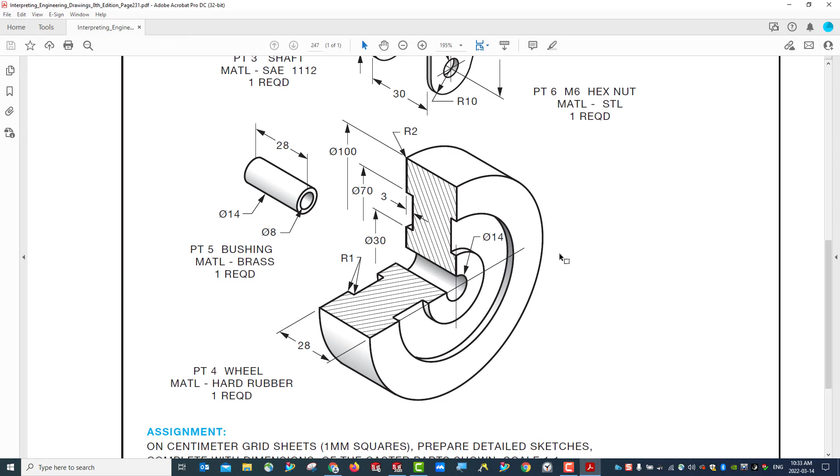Let's look at this drawing first. Here's all the components: Part 1, post. Part 2, bracket. Part 3, the shaft. Part 4, wheel. Part 5, bushing. And part 6, here's the nuts. This is the standard parts, so we can download from this supplier, or we can insert the nuts from the library if it's available. Now let's get started.

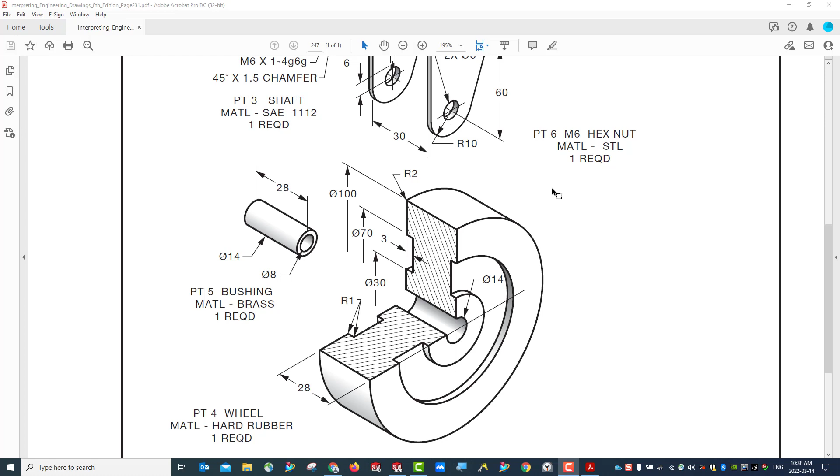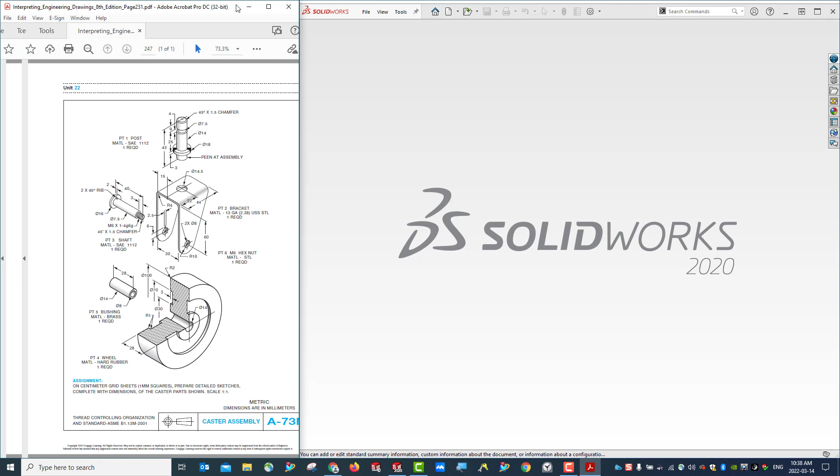From making this simplest part, wheel first. We're going to put our windows side by side so we can have it more easily. Let's make a new part. Hit OK.

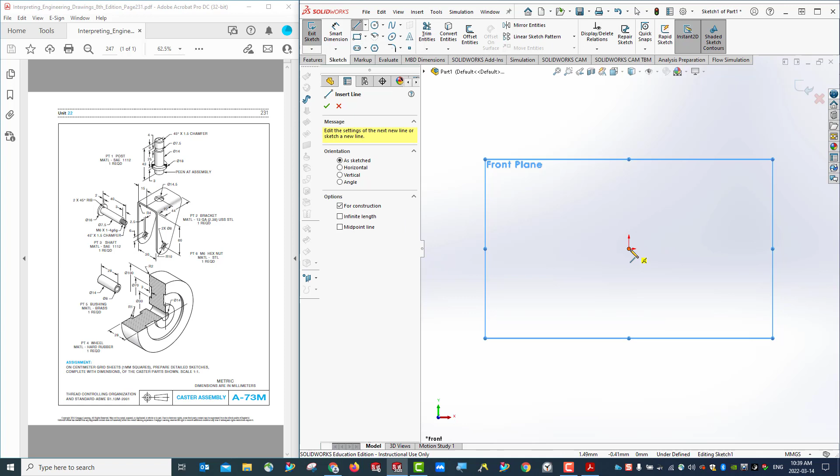First, determine your unit. We see here it is millimeter. We start with sketch. I'm going to make this section and revolve it. I'm going to make this front plane as my sketch plane. Sketch. As usual, I'm going to create my reference line, vertical and horizontal. Now I'm going to create the profile.

I'm going to create just a quarter and then mirror it, so it will be something like this. And then we have a slot here. Make another one, make slot. Uh-oh, I don't want to make this one to be the center. Okay, so you can see we have a slot here, we have a slot here.

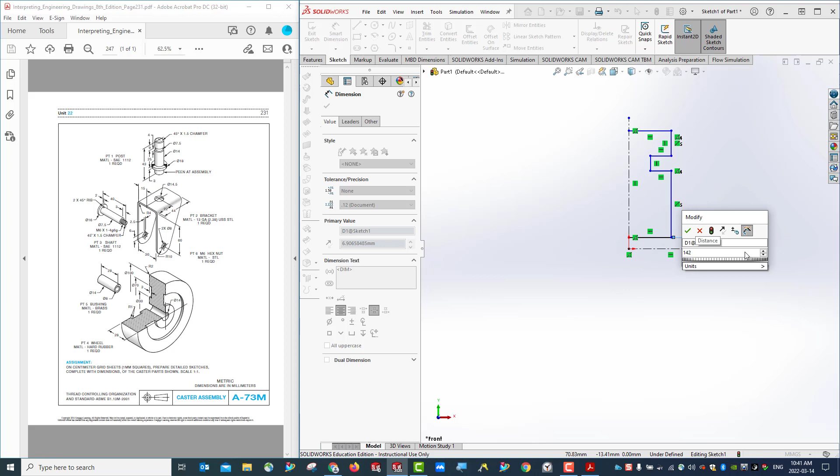I'm going to trim it. Alright, now give it dimension. From here to here is the hole size, which is 14. So 14 divided by 2, divided by 2.

And then the overall diameter, 100, then divide by 2. Oh, that's too bad, so I'm going to move this down.

Okay, and then we know this rim is 70 from here to here, 70 divided by 2. And this is 30, so from here to here, 30 divided by 2.

Okay, and then from here to here, 28, from here to the center. Cancel. From here to here is 28 divided by 2. Okay, this one.

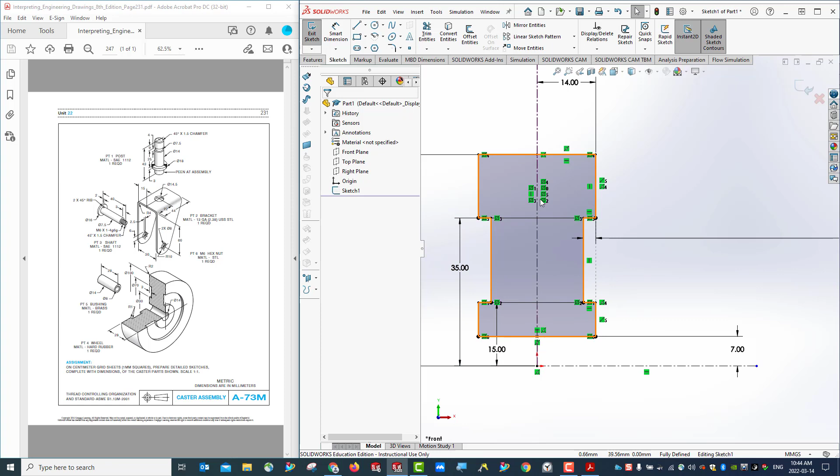Exit sketch. I forgot this line, so let me edit the sketch and mirror again, mirror this one above the center line. Hit OK. Now I should get that's right. So once my profile becomes a closed, enclosed area, then the sketch becomes dark, indicating it is a closed loop.

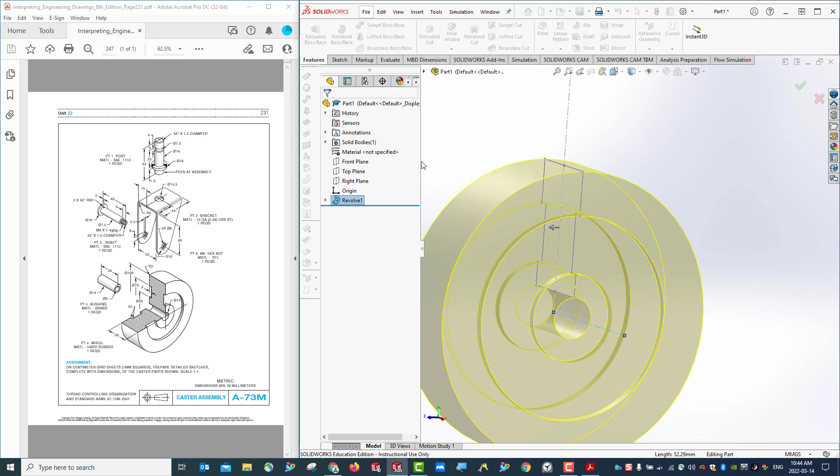Now I can get my wheel. Use revolve. Here's my plane. Okay, hit OK. There are lots of details here.

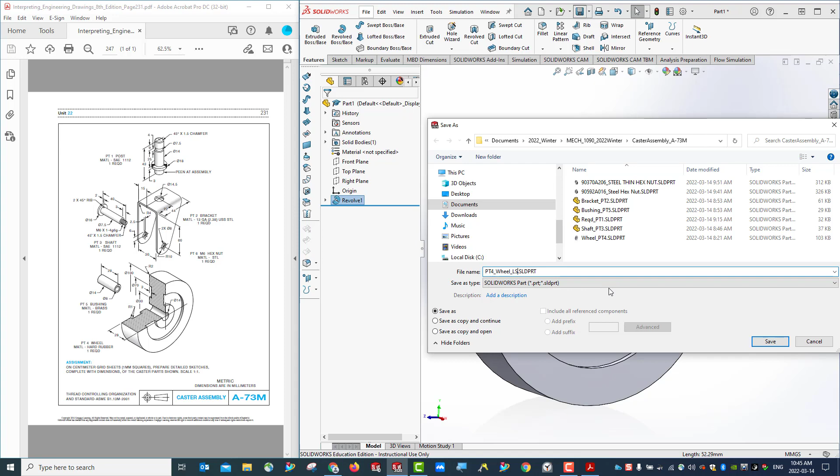I'm going to leave this detail for now, and I want you to do this by yourself. I'm not going to demonstrate this here, so I'm going to save this part as part 2, part 4, wheel, and give my initial. I always put my initial at the end of my file, so I know it is created by myself. Whenever you get your part done and you're satisfied with the modification, save your file.

Now we get the first component being created. Instead of creating the other components, we are going to use a different approach. This time we're going to make the assembly first. So we're going to create a new, this time the assembly, hit OK. You can see, and we put this one into our assembly. Okay, now you can see the assembly and the first component.

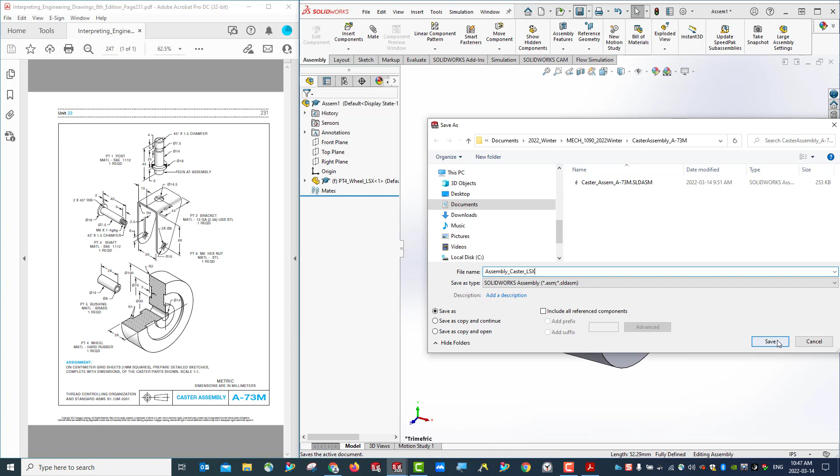Let's save this file first. So it will be assembly caster with my initial. Save it. Also, make sure it is in millimeter.

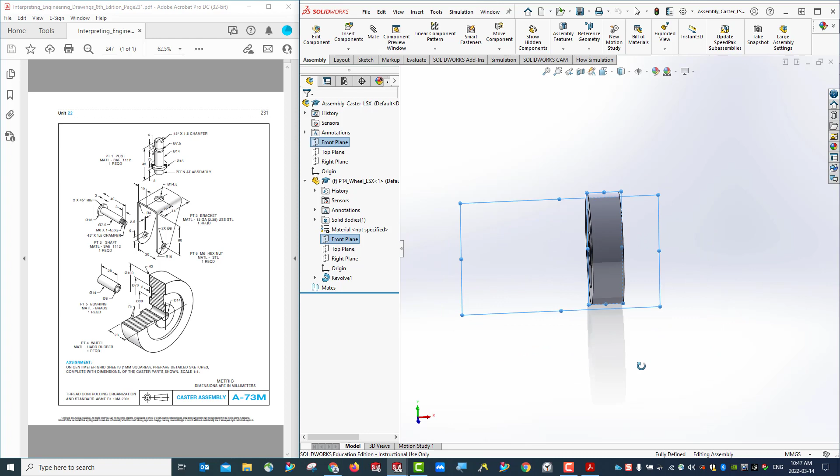Now you can see, if we look at the front plane, whether they are aligned or not. They are not, right? So that means they are not in the position as I expected. So I'm going to modify this.

First, I want to make my part float. The first component being put in the assembly, usually by default it is fixed, so I want to make it float. Once I make it float, I can move it to the desired location. So I'm going to make the front plane aligned with my front plane.

Coincident, accept this, and then top plane with top plane, coincident. Right plane with the right plane, coincident. So the coordinate system of my assembly and the wheel will be coincident to each other. Okay, so you can see origin and origin are the same, right? They coincide. All right, let's save this for now.

Because I already have my mates, it's similar to what we have with fixed. Okay, we will not be able to move this part without disabling our mates. Now, if we look at those mates, those mates allow me to fix my components in the assembly. So I'm going to put this one.

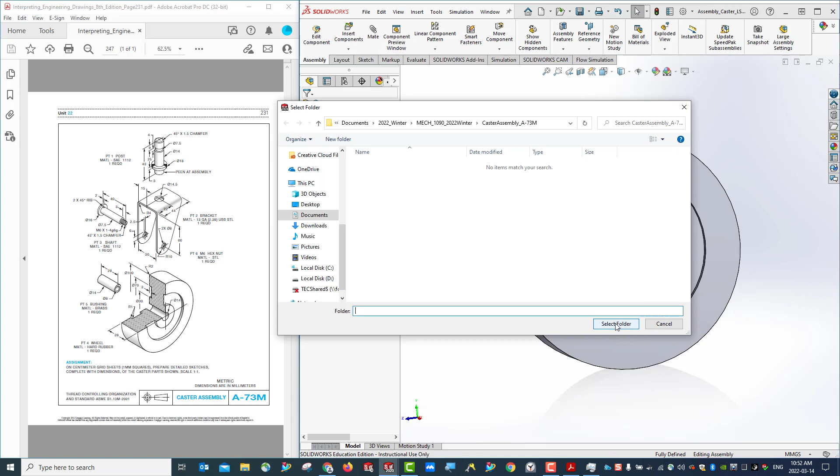Okay, save this part externally, so it will be on my disk. So I give the name. The folder is the same as my assembly folder, and I give the name. It will be part 5, bushing, with my initial. Hit OK. Save my file.

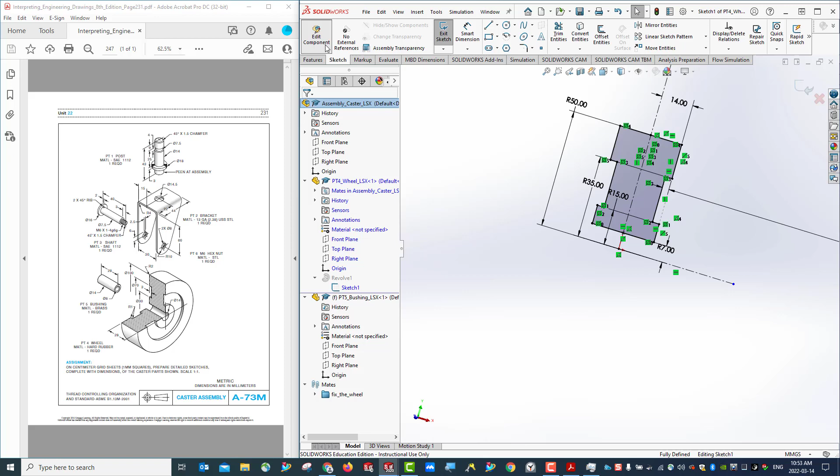Okay, now you can see. What can we use? We can use our sketch here. Make it visible. Okay, and then we're not going to modify this one. Instead, we want to exit this edit components.

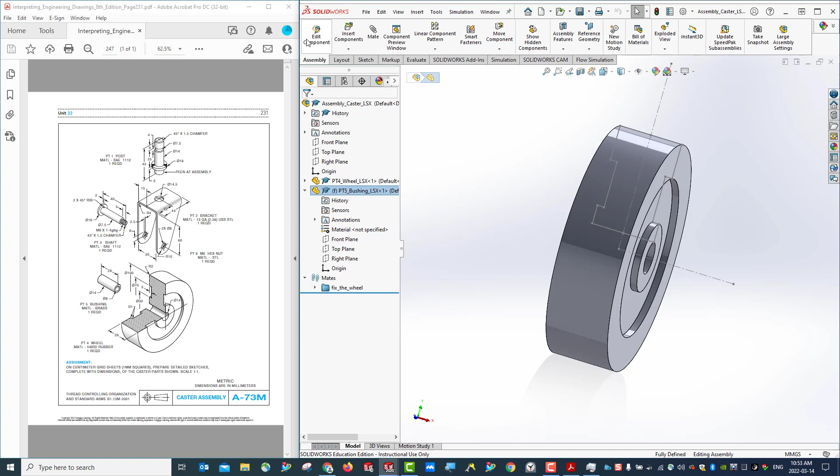Actually, we would like to edit this component, part 5 bushing. So select this part 5 bushing and hit edit components. Make sure it is in assembly, right? So now we can work on this, and we use front view to do this.

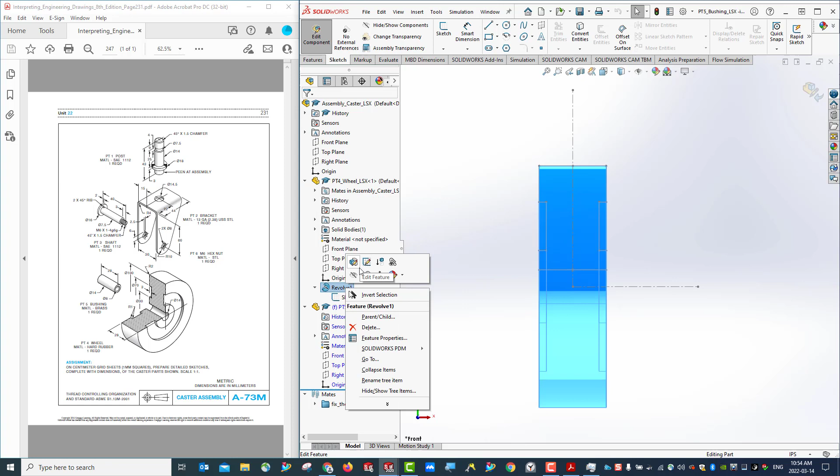We're going to create - let's hide the solid first, so it will allow us to get a more clean view, right? You can see part 5 bushing is in blue, so it becomes available for us to make some sketches, make features, do anything, and modify this part. Okay, in the title bar, you can see part 5 bushing in this assembly is what we're looking for, what we are working on.

Okay, let's get started. I also want to use this front plane to create my sketch. Just okay, make sure you're creating your sketch in this part 5, not in assembly, not in part 4. Okay, so this is very important.

As usual, I'm going to make an assembly reference line here. Okay, here's the horizontal reference line, and then vertical reference line. Then I'm going to make a rectangle.

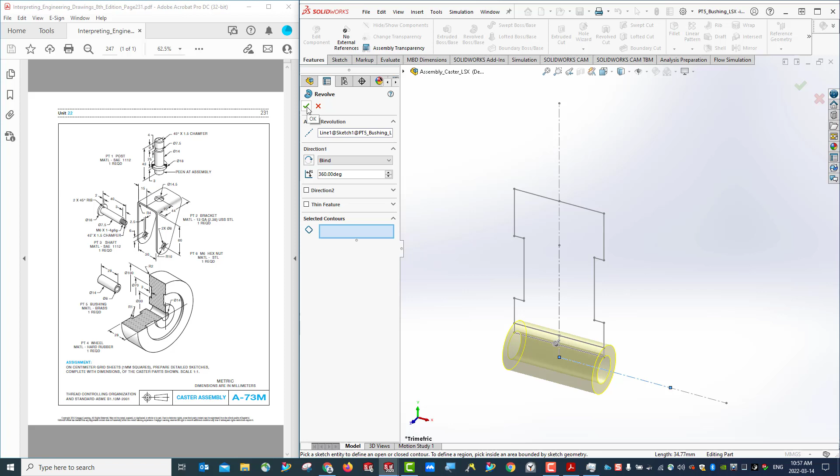Simply revolve it. We're going to use the sketch here, and this sketch profile is being automatically selected. If you have other complicated geometry you want to create, then you need to select a different curve as your profile. Okay, now we have the bushing.

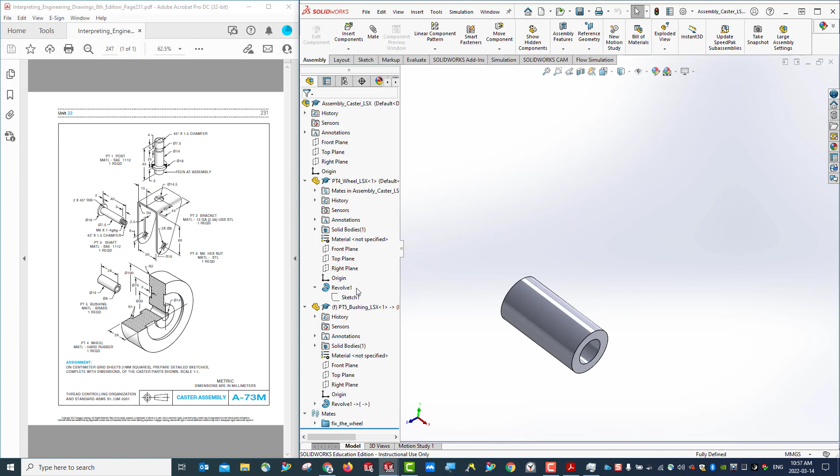Right, so let's save this file, and then click Edit Component to return to the assembly. Okay, so let's hide the sketch and show the body of the wheel. Then we have 2 components now. Save everything. Let's Control 7 to bring to isometric view to see our assembly.

So this is the second part being created. All right. Now we have 2 components. We can start to create other parts.

Again, we're going to insert a new part in the assembly level, part 3. Let's save this one. Okay, double check whether my datum plane aligned with my datum planes in assembly, which is correct.

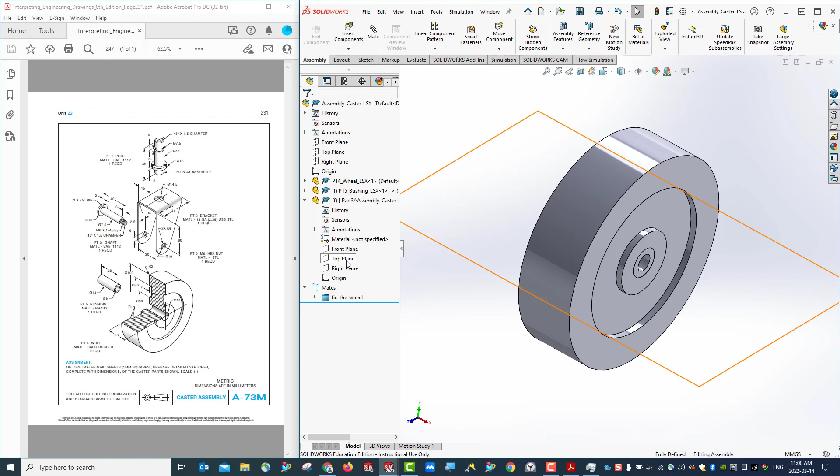So I'm going to start in the right view. I'm going to create this profile. So right plane, make sure you choose this part 3, okay, and let's save this first.

Part 3, rename it to part 2, bracket, and also give my initial. Save it.

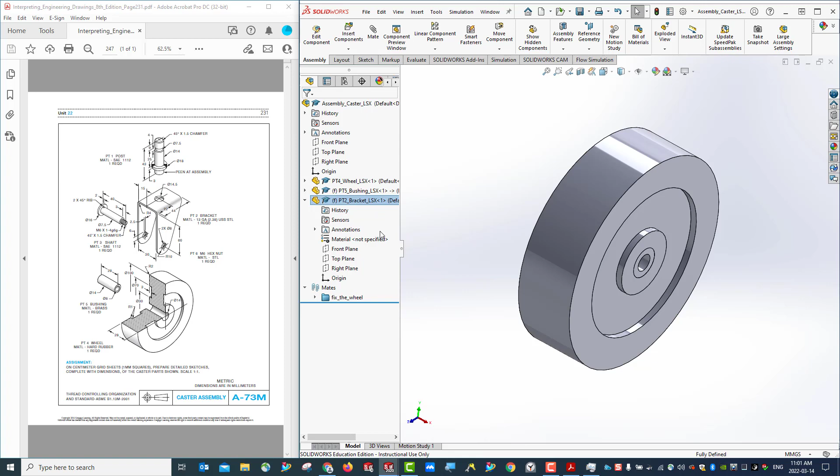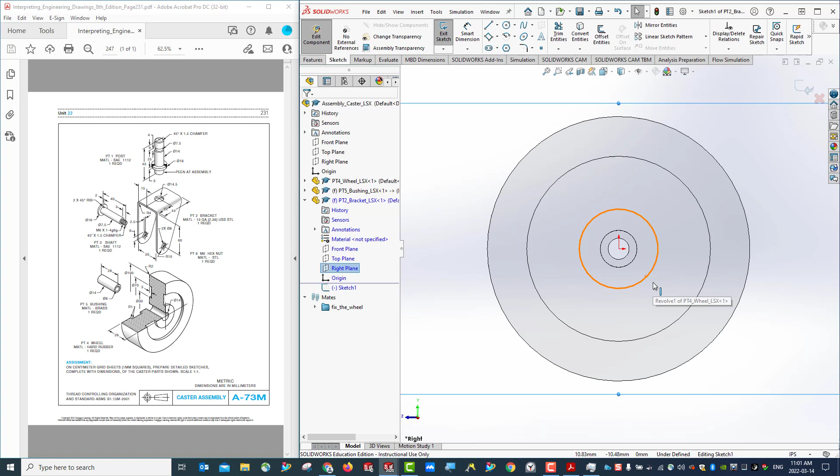Good, then I'm going to edit the components. Alright, edit the components, and then we're going to use the right plane to start the sketch. So let's look at it. Bring it to the right view. Okay, good. What we can do is, as usual, we're going to create some reference line.

Okay, so first I'm going to create the center hole. This hole is 8 millimeter.

You can see this hole is the same size as the bushing hole, right? Which is exactly the same dimension as we expected. Let me change this one to millimeter so when I create my sketch it will be easier. Okay, 8 millimeter.

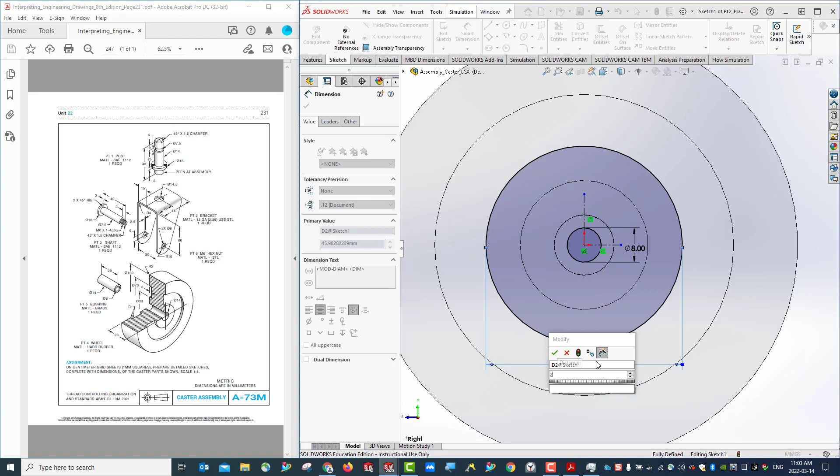Then here's the radius R10. I'm going to create this one. Give dimension. It's going to be 20. Alright, then this line is vertical.

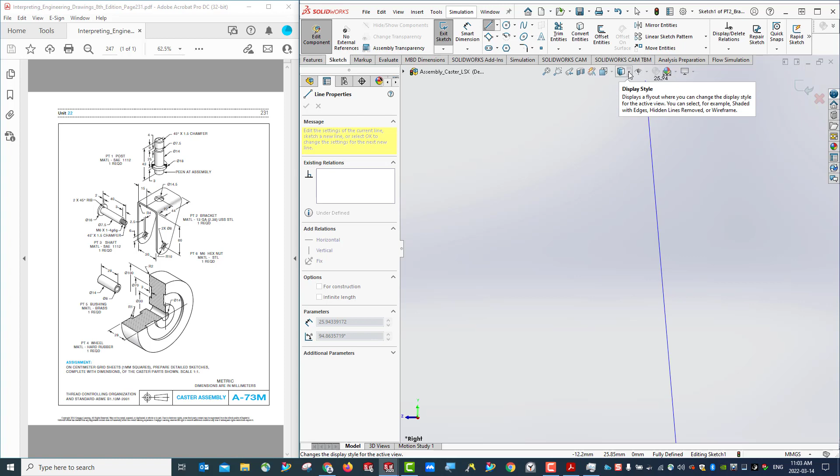So we're going to get a vertical line starting from this circle, right? Starting from this circle, so it's going to be on here. And it's going to be made vertical, right? So, and also it's going to be higher.

The profile will be from here to here. We're going to have a tangent line here, right? So from here, draw a line like this, and I'm going to add a relation. So this line and the circle is going to be tangent.

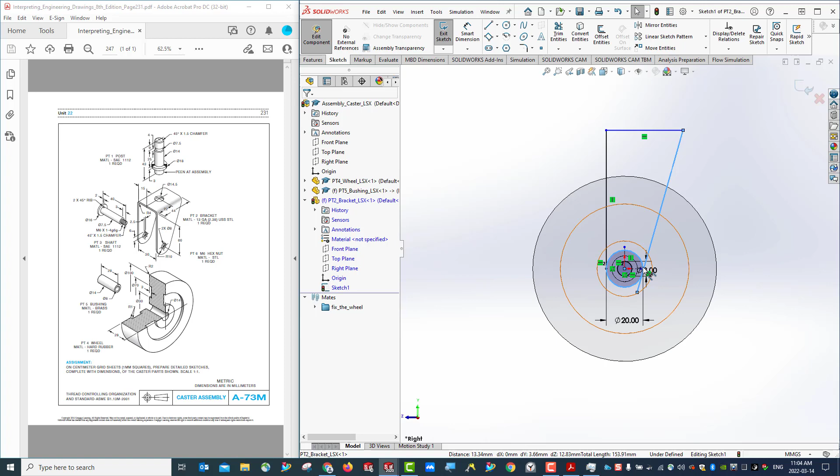Hit OK. Alright, so we can also see the dimension is 60, right? This 60 is from the inner side to the hole center. So what we're going to do is give dimension including the thickness here, which is 1 millimeter. So from top to the center will be 61 millimeter.

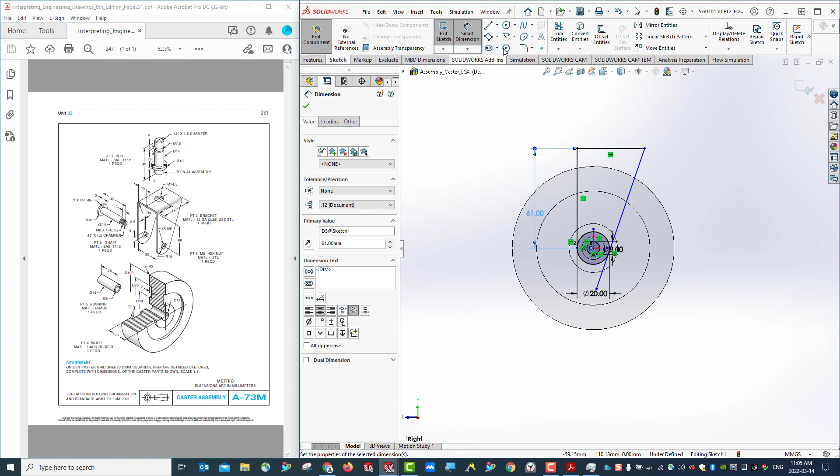Okay, now I can trim my curve. I get a profile. Alright, and then you can see the width is 44 millimeter. So I'm going to give dimension. This is 44.

Okay, fully constrained sketch here, and I would like to add one more here to represent the inner side, right? So it's going to be 1 millimeter material thickness. Let me trim this.

And then trim this. Okay, we also recognize on this side we have a slot here, so this rib can extend here, to prevent this shaft from turning with the wheel, right? So I'm going to put it here.

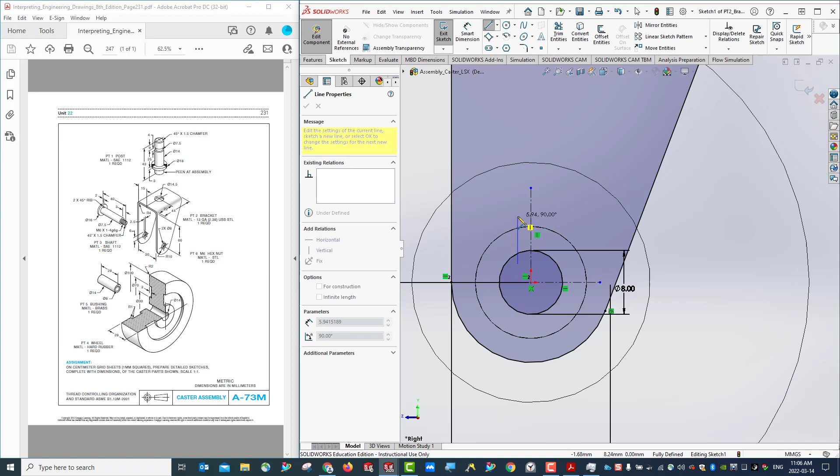It's going to be from here to here to here. Okay, then give dimension. The dimension from here to the center will be 6 millimeter, and from here to the center it's going to be 2.5 divided by 2.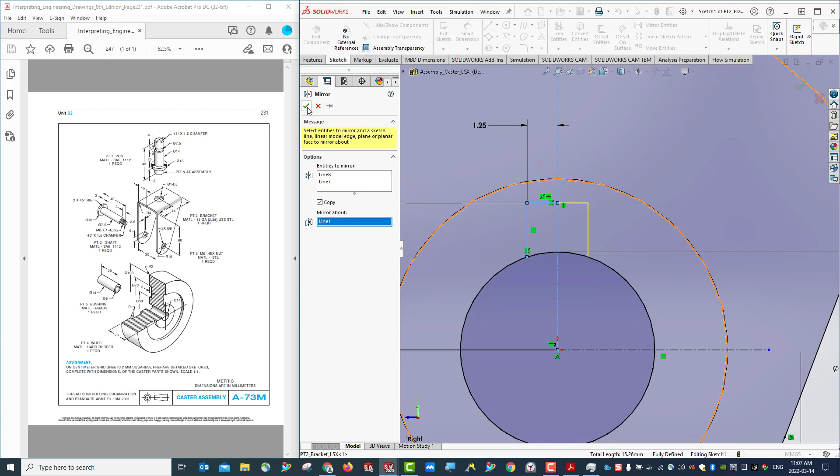Then I'm going to trim it, then mirror it. Mirror these two here, and use the center line as my mirror plane reference. Now we get the slot, right?

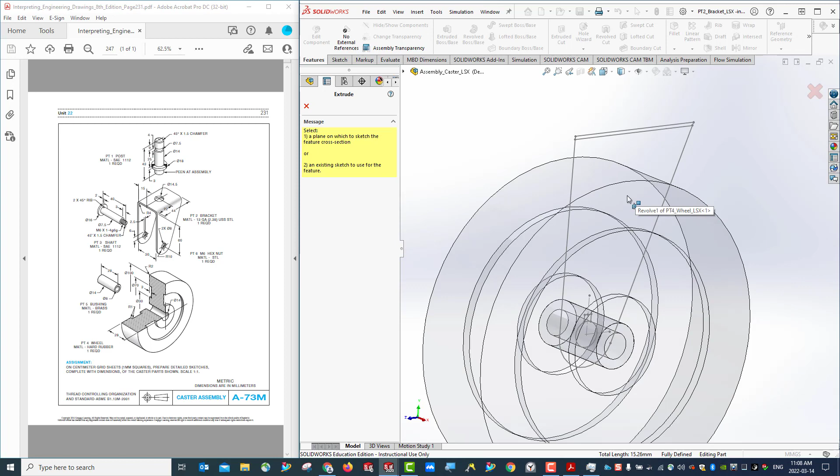We are going to create this bracket. Done. How can we create this bracket? So we are going to extrude it. Okay, extrude. So we're going to extrude.

We also include this hole. We would like to include this hole to extrude, right?

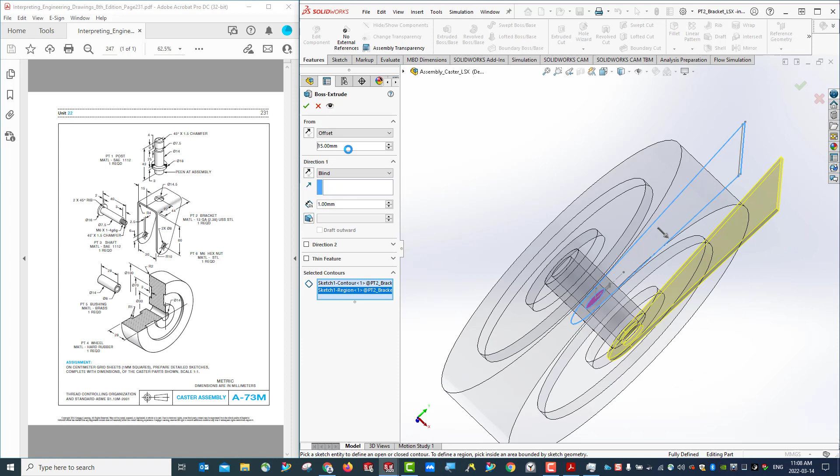So then we would like to offset. We know it's 30, right? The width is 30, inner space is 30. So we are going to offset from here to 15. Offset 15. And then the thickness will be 1 millimeter, representing the thickness of the material.

We get this. Right, let's look at here. Okay, outside profile, which is correct. Okay, on the other side, not only with this one, but also with that slot, right? So make this visible, and I'm going to extrude again.

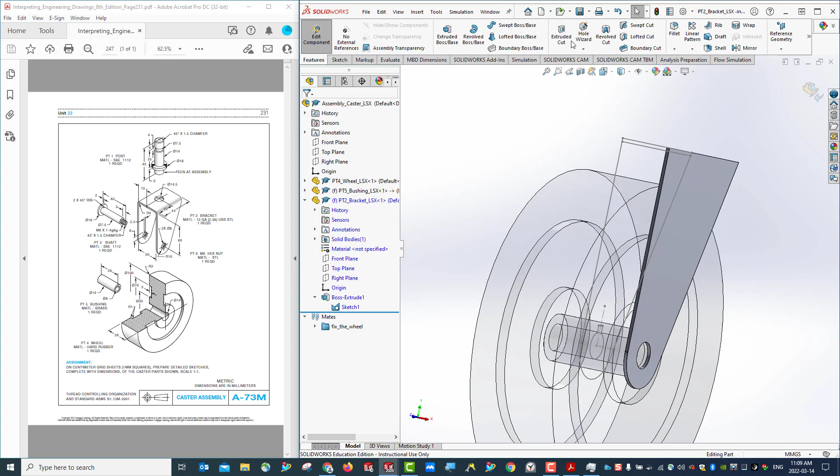But this time, it's going to be in the other direction, offset 15, and thickness 1 millimeter. Okay, but this time we also include this one and this one, so we have a slot. Hit OK.

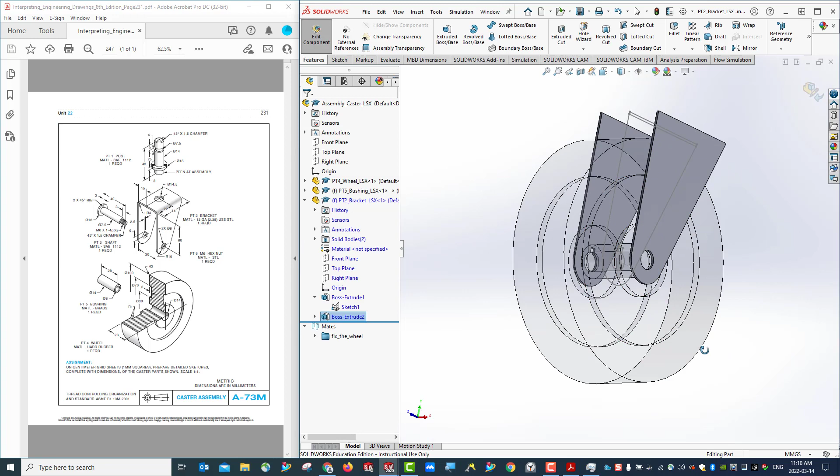We have two sides. Then we need the top. This time extrude. We delete and only extrude this one. So this time we're going to start from the sketch plane, right? So it's going to be middle plane and it's going to be 15 on each side. Okay, it's going to be 30 together.

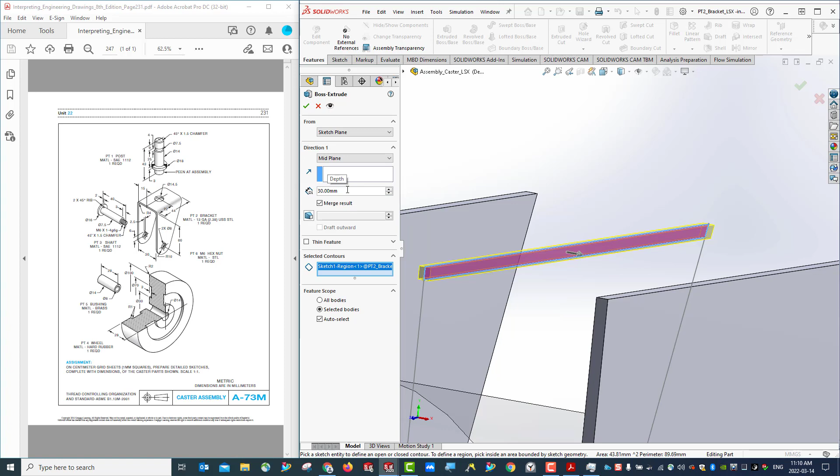Okay, let's see. Yeah, it's correct. That's correct. And merge the results, so it becomes a whole. Let's hit OK. Now we have the bracket.

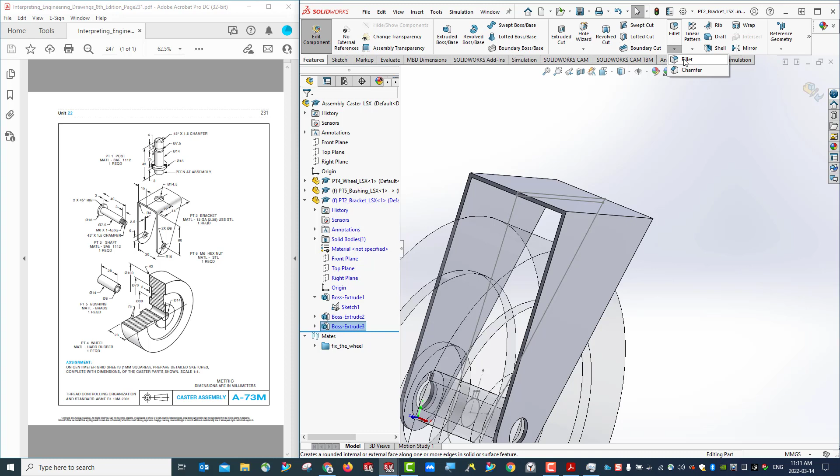However, we have the corner being rounded, right? Rounded corner here. Okay, so we're going to make a fillet. Let's make the inside fillet, which is R4 here, right? R4.

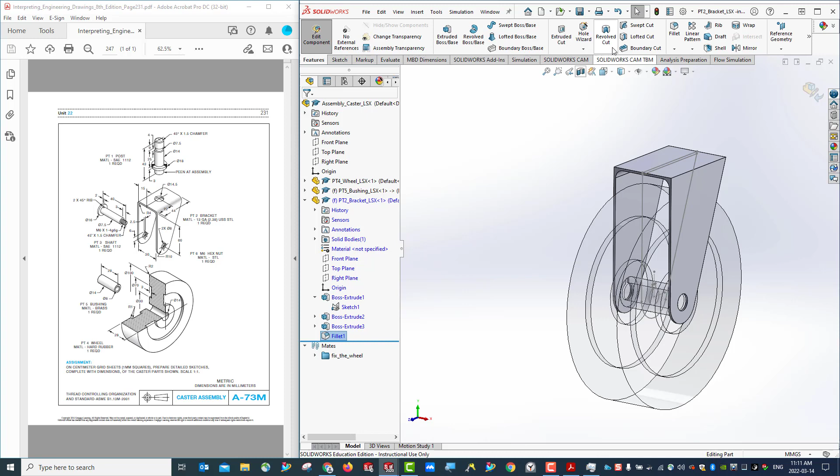Okay, and also here. Good. Then outside do the same, but this time we have radius which is 5 because the thickness of the material is 1 millimeter. Okay, here's my bracket. Once I'm done, I can save my file.

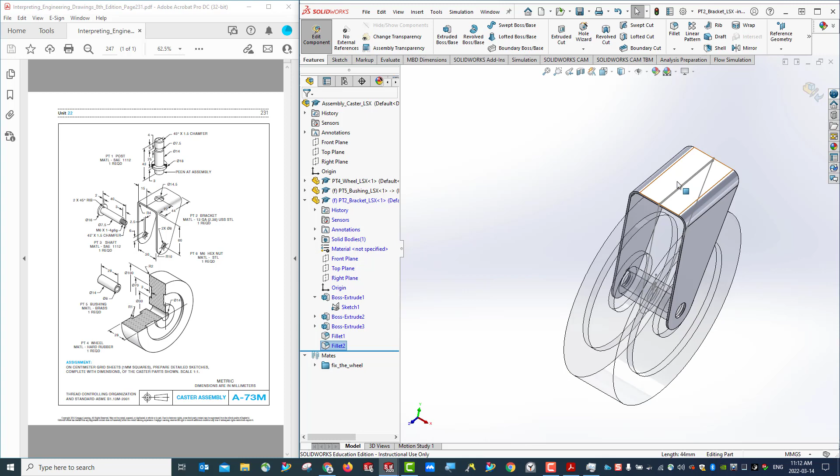I'm satisfied with this for now. One more thing here is this hole, right? You can either draw a circle on this plane, or you can use a hole wizard. Let's use this hole wizard.

We can see we're going to use this hole, and we're going to say it's going to be metric, and drill size it's going to be 14.5 millimeter. I already selected last time, so by default it's doing this. Okay, right, and it's going to be a through hole, and okay, which is good.

Oh, the surface to locate the hole. Alright, I would like to select the center point. Let me see if I can make... yeah, it is available. Oh, this is the only point I can choose, the center point of this.

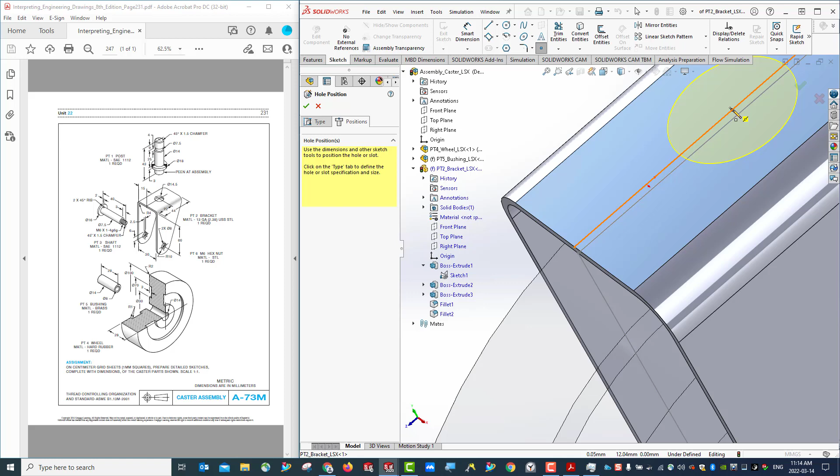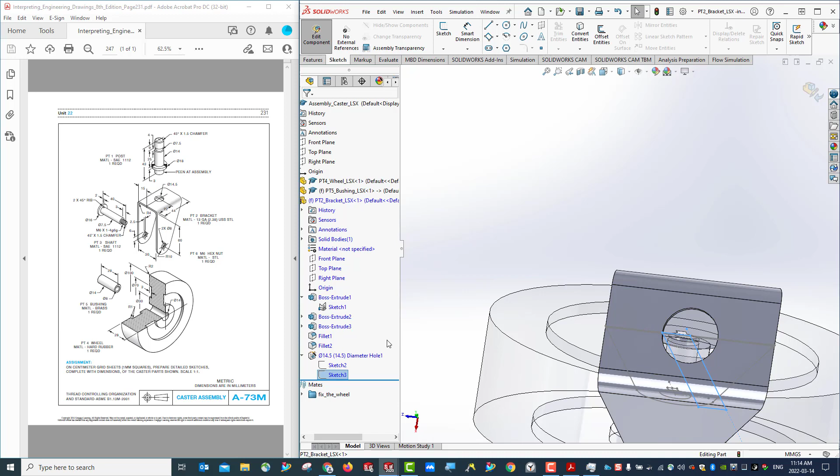You can see here, this hole contains two sketches. One is for the center, the other is for the profile. Okay, so this is the end of the bracket.

Now I can save my file, and then stop editing my components, and save all the assembly. Bring it to my isometric view. Okay.

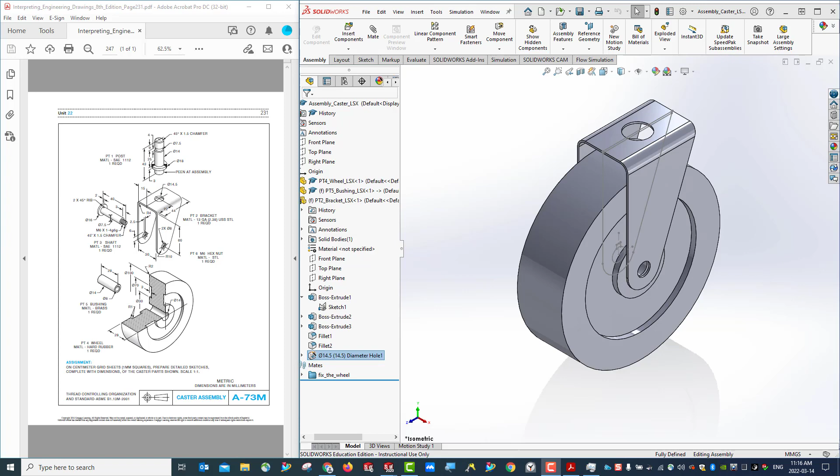Now I'm going to create another part, which is the shaft. Okay, so this time I'm going to extend this a little bit. I'm going to rebuild this one first. So, and then save it.

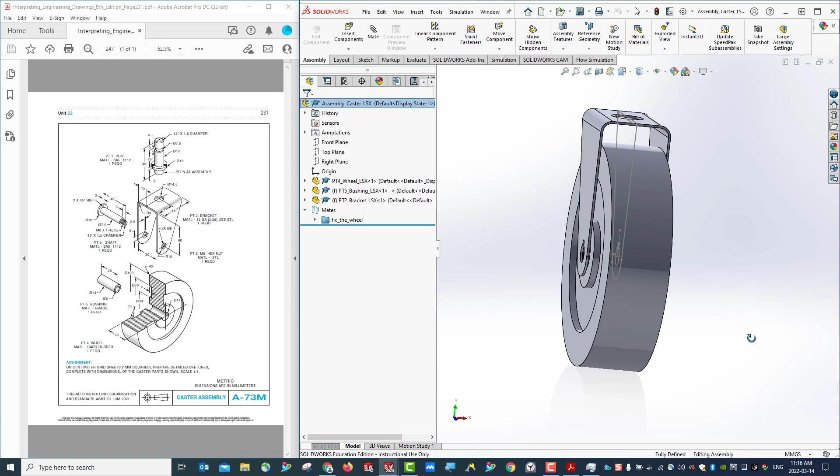And shrink. What I can do here, we're going to create the shaft and put it here, right? So let's hide everything else first.

So hide this one, hide my wheel. I can leave my bushing here, right? But even for the bushing, I would like to hide the solid and only show the sketch.

Alright, so once I have this, then you can see I can use this reference to create my shaft. Okay. If necessary, I can use this bracket as a reference later.

Let's save it. Save all. And then what I'm going to do, I'm going to insert a new component, which is the part. Put it here. As we know, it's always been aligned, right? So we don't need to worry about its orientation. So let's save this file first.

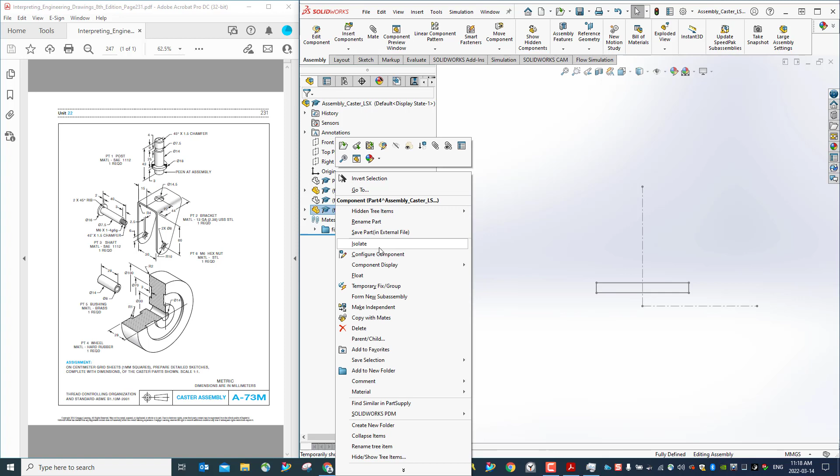Give the name PT3 shaft. Give my initial. Hit OK.

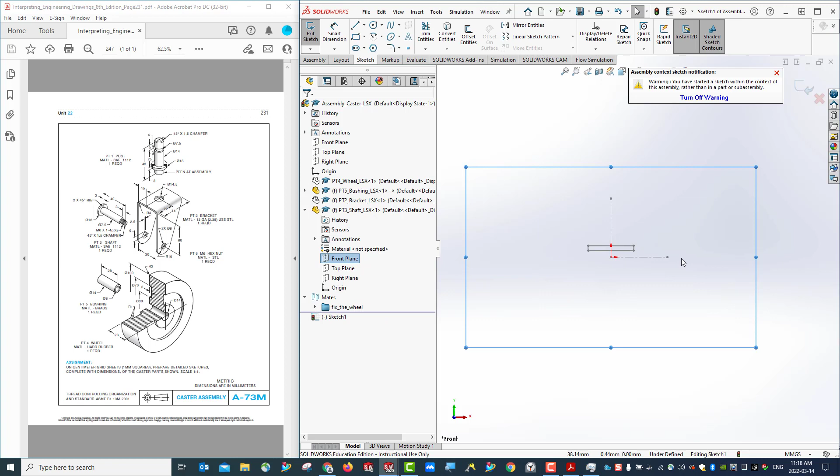And then you can see I'm going to this front view, right? Here's my front view. I'm going to use front view to create my sketch, and then I'm going to use a sketch to create my solid. First, as usual, I'm going to create my center line.

Now here's my center line, and then vertical center line, vertical center line. Okay, now I'm going to create here the half profile.

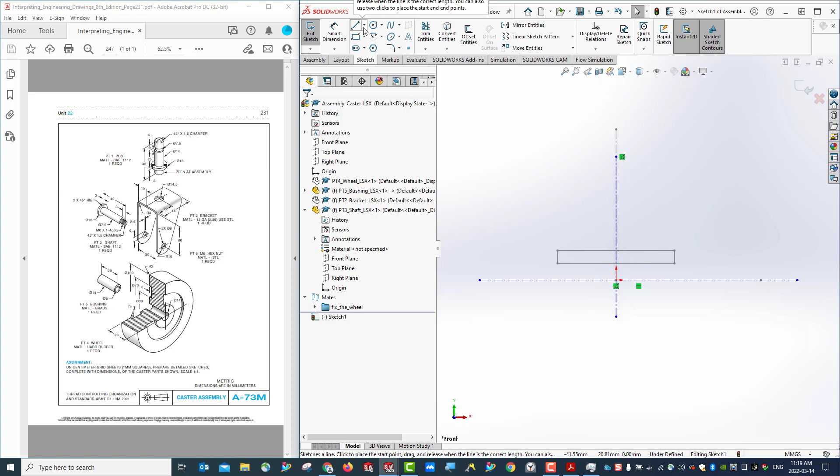It's going to be a step, the cap, and then a step, and then one more step for the thread, and then here to here. Okay.

Alright. So the diameter, let's start from the small one. The M6, right? M6. So dimension from here to here, it's going to be 3 millimeters. From here to here, it's going to be 7.5 divided by 2. And here it's going to be 16 divided by 2.

Okay, that's the radius. And then from here to here, the total length is going to be 40. Going to be 40. From here to here, it's going to be 2 millimeters. And from here, it's going to be 3 millimeters.

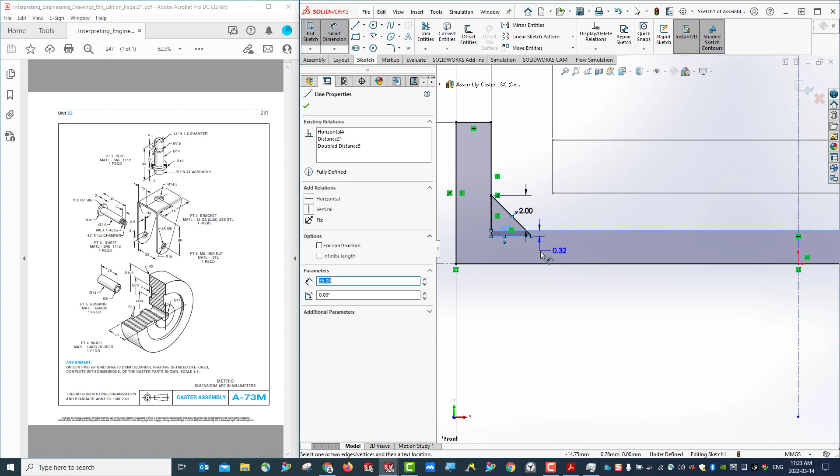Alright, so this is my rib, and I'm going to give it a dimension from here to here—it's going to be 2 millimeters. Okay, and the angle from here to here is going to be 45 degrees, and I would like to give a dimension from here to here. It's going to be, say, 1 millimeter to be safe.

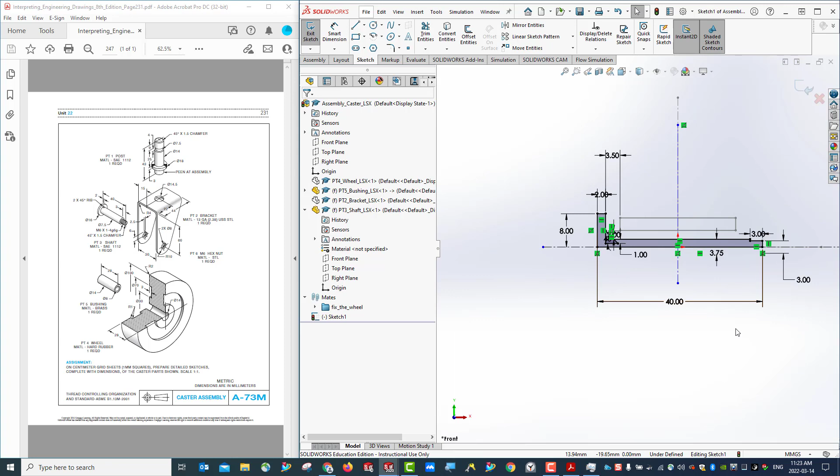Hit OK. Then I can have this rib being extruded and united with. If I just put it here, it's going to be tangent here, and it's going to be line contact between the rib and the shaft, right? So between the rib and the cylinder, you will get trouble. So here's my profile. Let me start to work on it.

I think I made a mistake. You can see I used assembly - this sketch is in the assembly context, not in the shaft. So what I need to do is make this one my working part, then I can use this sketch, or I can delete the sketch. Let me delete the sketch - this is not the correct way to do it.

Remember, if you don't make this one your working part, or make the edit components first, whatever you do is going to end up in the wrong file. Remember this mistake I made - it's a good example, it's a bad example, but it's also a good example.

So, front plane sketch - this time we're going to make it more quickly. Center line here, here, and then I'm going to create my part. Make this one horizontal, then here, here, and also from here to here to here to here. Now give the dimension - here to here to be 40 millimeter.

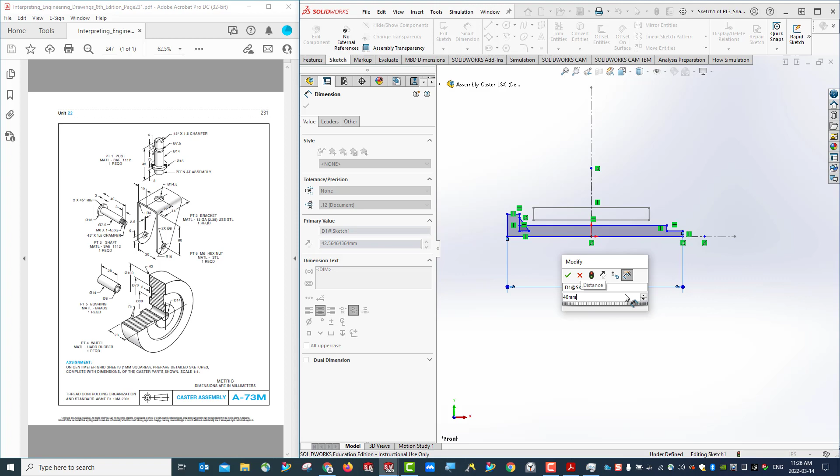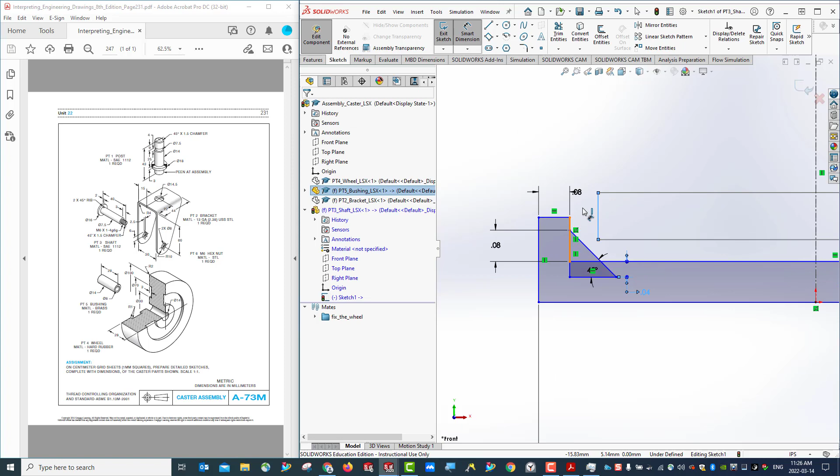Here to here, 2 millimeter. Here to here, 40 degree - 45 degree. Here to here, 1 millimeter. And from here to here, 3.5 millimeter, and from here to here it's 8 millimeter.

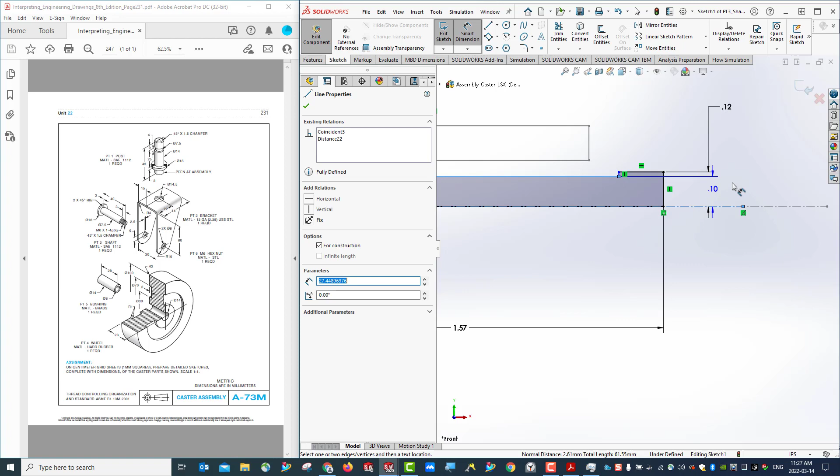And here to here, 6 millimeter - 3 millimeter, sorry. From here to here, from here to here, it's going to be 7.5 divided by 2, so 3.75 millimeter. Okay, done.

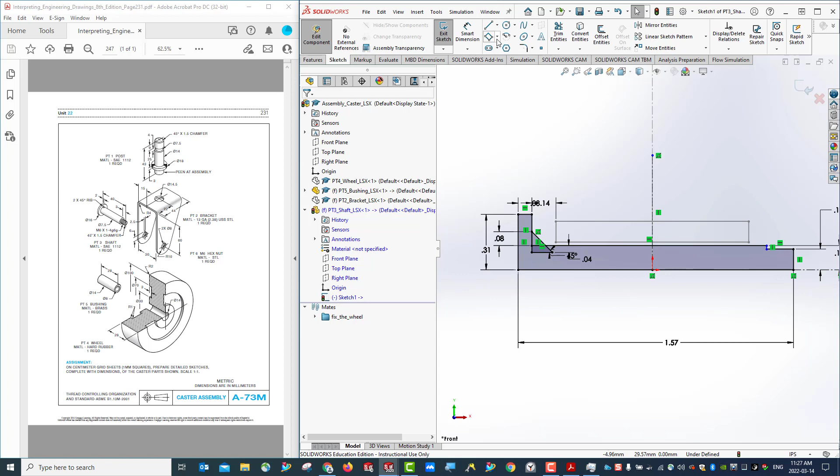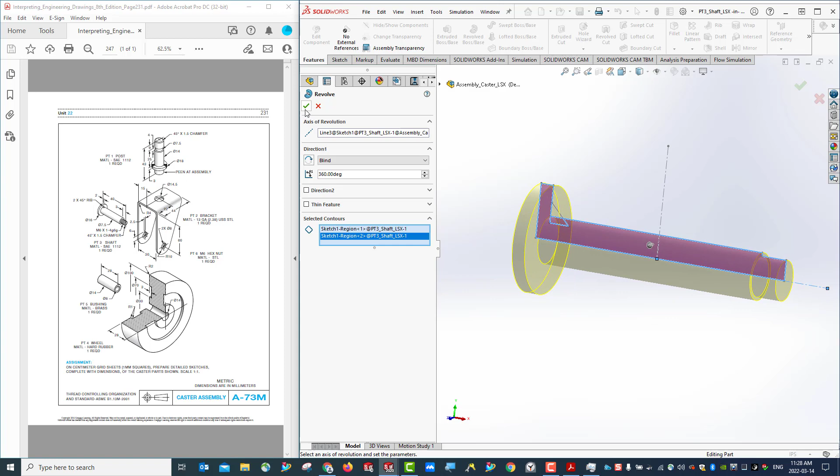Rebuild everything. Now we can hide this one for now, and then revolve it - revolve, it's going to be this one and this one. Okay, you see that's my shaft, and then I'm going to create a rib.

So it's going to be the mid plane and 1 millimeter, so it's going to be a 2 millimeter rib. Here, 2.5 millimeter, right? So here's my shaft. Control 7, and then hide my sketch.

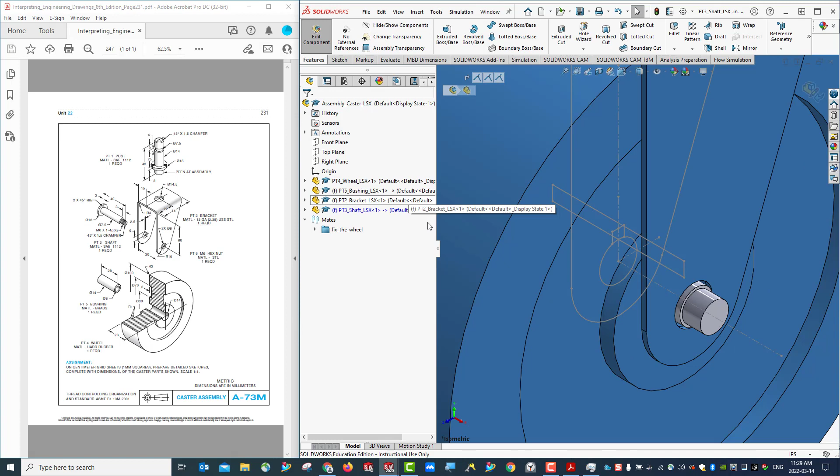Here's my shaft. If we look at all the components - unhide everything, you can see. Not bad. Control 7, and then edit, save my file.

Okay, now let's create part 1 post. Again, we're going to insert a new part, okay, and then save it externally. Give the name pt1_post and my initial, okay, save the file.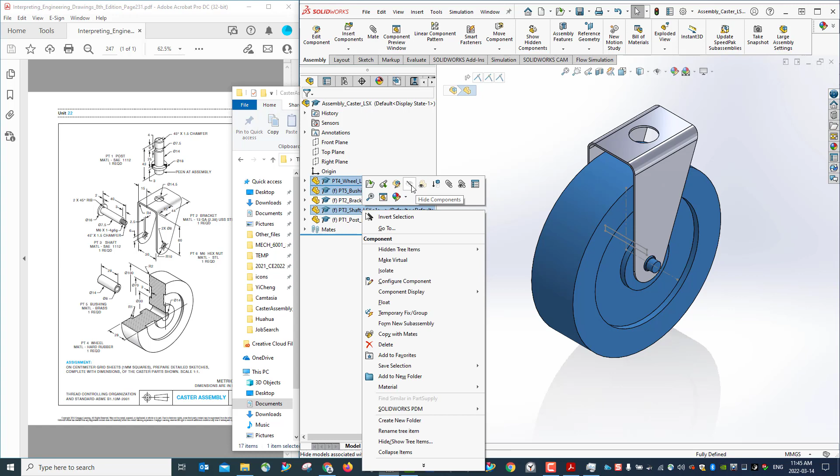Now we're going to hide everything else except the bracket - we can use our bracket as a reference for now. Then make sure to edit the components so this becomes blue, and I'm going to use the front plane to create my sketch, bring it to front view. Start with my center line to create the reference first.

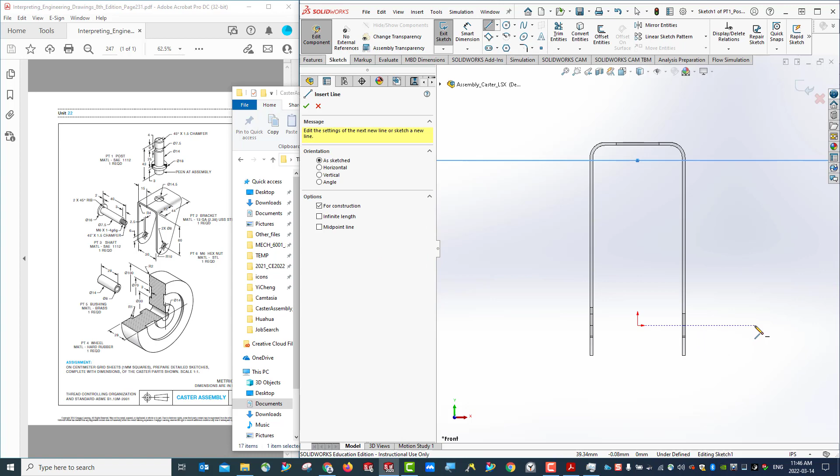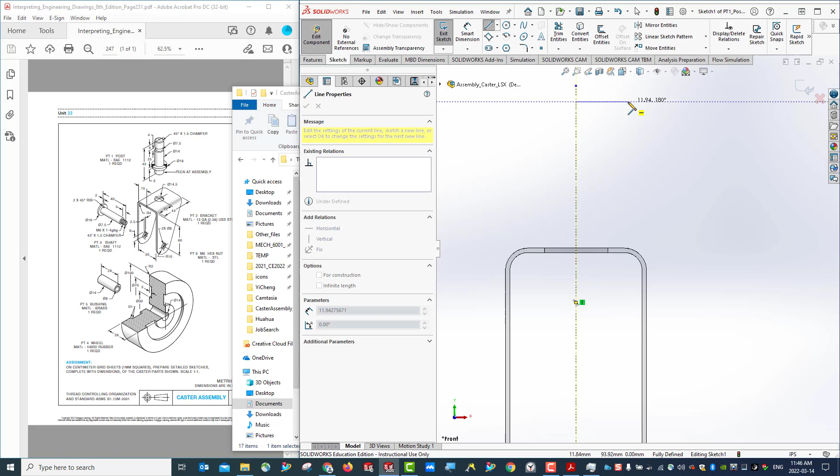Okay, now the shaft is going to be - this post is going to be put here, right? So we're going to make it something like this. And then it's going to be say 43 millimeter.

And it's going to be 14 in diameter, so it's going to be 7 millimeters - control Z, it's going to be 7 millimeter.

Okay, then add a sketch again. Now we're going to have a groove here, right? So then we're going to add a step here, and add a groove here.

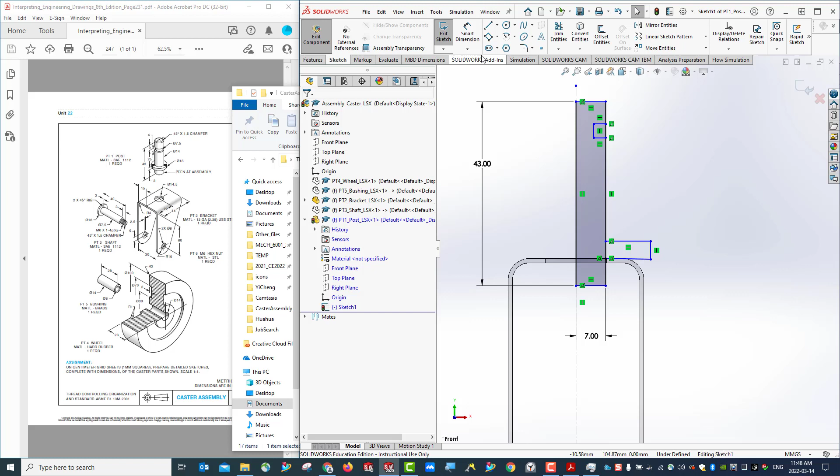So the diameter will be 8 millimeter, 18 millimeter, so radius is 9 millimeter. From here to here, it's going to be 7.5 divided by 2. Okay, and then this is 4 millimeter from the top.

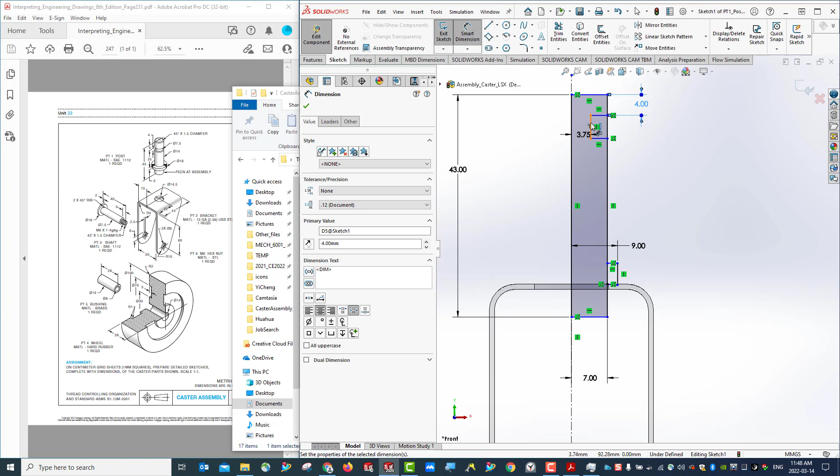And it's going to be 9 millimeter in length. Oh sorry, this is 9 millimeter, this is 4 millimeter.

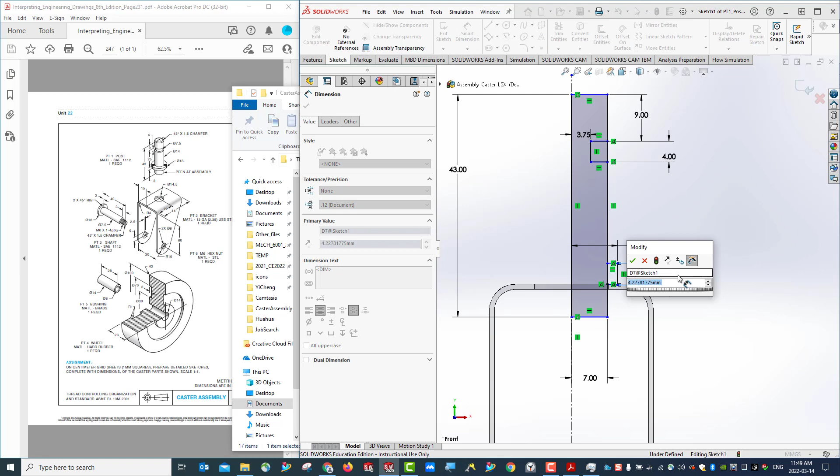And then this one to be 3 millimeter. And also, this is supposed to be horizontal.

And also you can see this one is - can we move this up and down? No, because there's a constraint here, right? So okay, we are good.

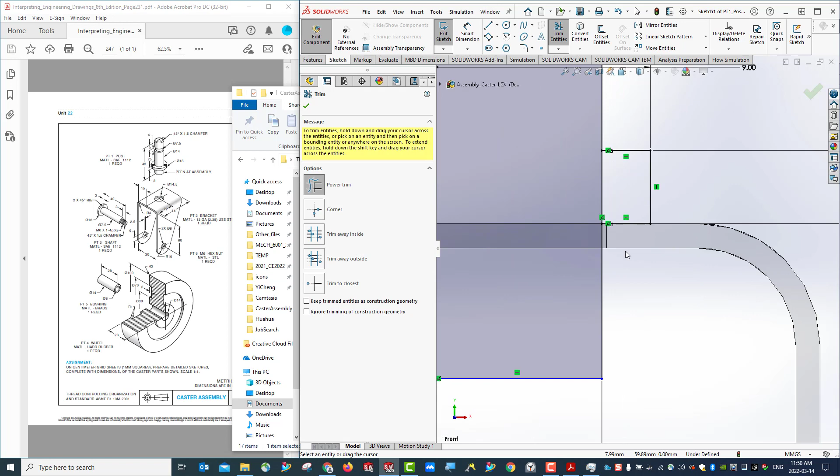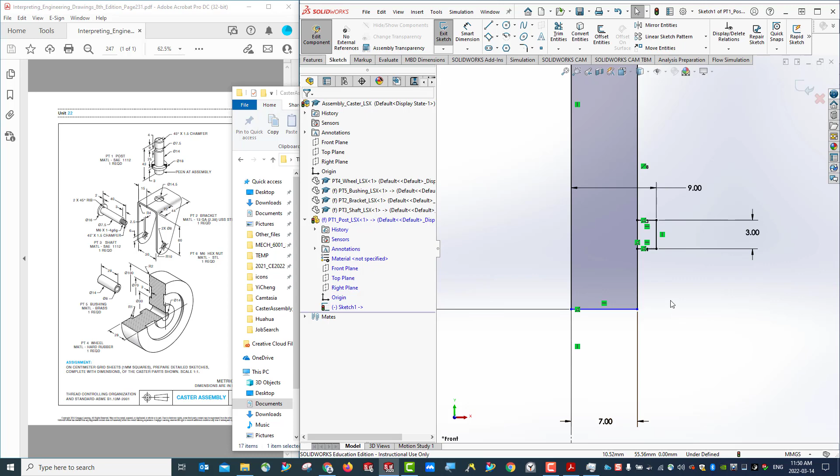Now I'm going to trim it - trim this one, this one. And trim this one, trim this one first, and then okay, let me hide this one for now. Okay, and then try to trim this.

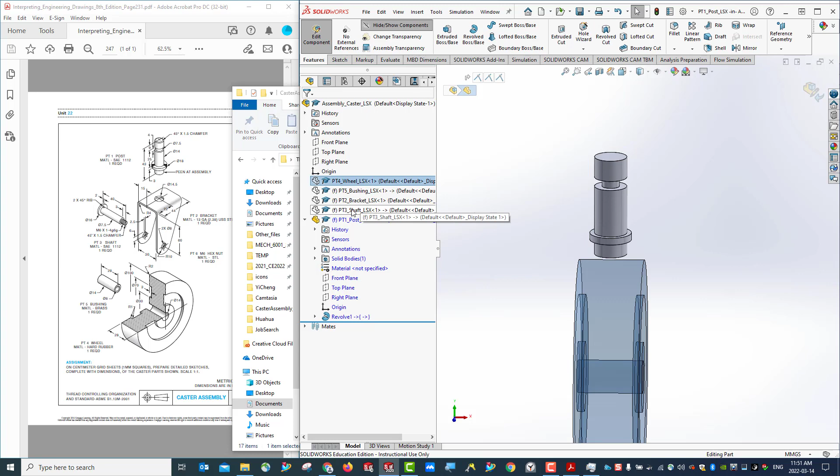All right, everything's fine. Sketch, and then I'm going to revolve it. We also have some chamfer and those details here - I'm going to leave it for now for yourself, so you're going to make it by yourself, and let me see all this assembly.

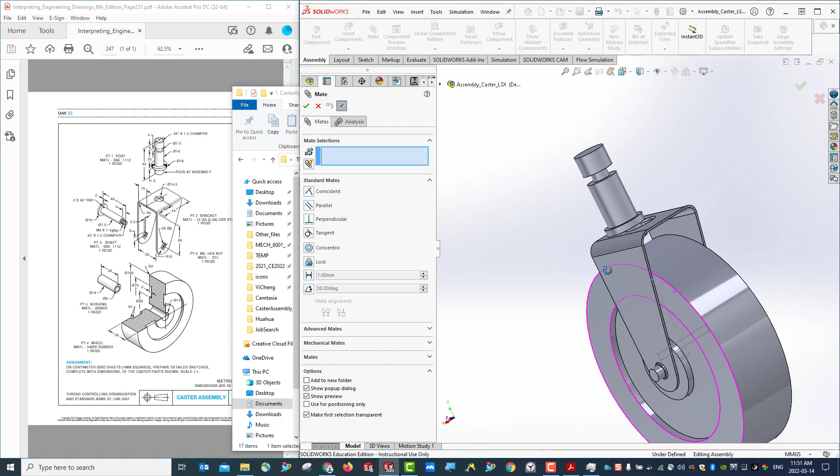Here we are. Okay, now it's not being put correctly here, right? So what we can do - this is being fixed, right? So make it float, and then use mate, and say this cylinder, choose this inner surface, make it concentric.

Alright, here's my assembly. There are some details that need to be modified, for example the chamfers and so on - we can do this later. To make my assembly more clean, I'm going to hide the sketches.

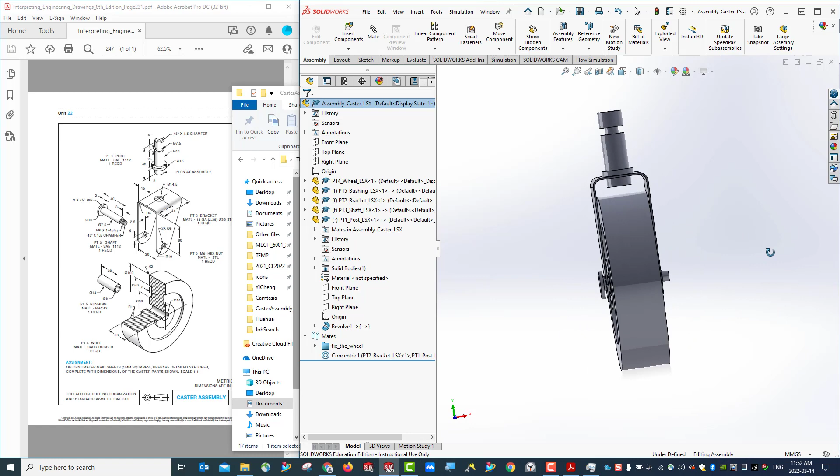Sketch, hide it, and then you can see - we also have some mates being put here, you can see. Use this method: creating a 3D model in assembly level can help us use a reference from other parts to find the relationship between them.

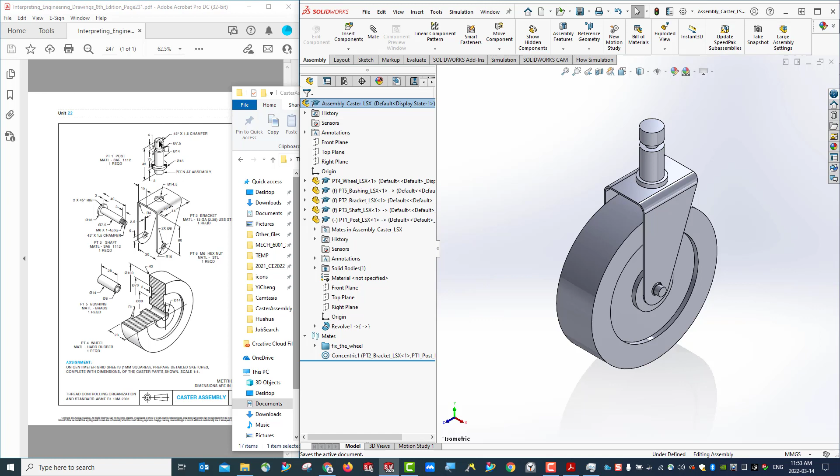Okay, so this is the end of this example. For now, you're going to make those chamfers, those radius, and so on by yourself to complete all the 3D models for each of the components, and then assemble.